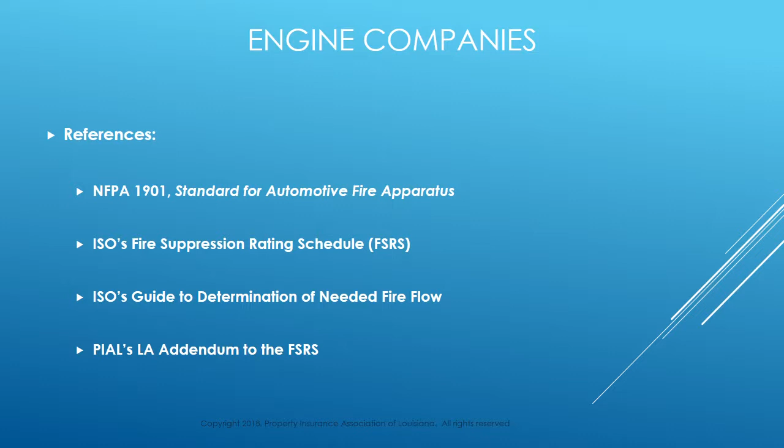References for criteria and credits related to engine companies are shown here. Before we address the engine companies themselves, we need to talk about a couple of items that affect them. The first is the concept of basic fire flow. The basic fire flow comes into play in several areas of your rating. Here's how we determine what the basic fire flow is for each graded area in the state.

Property Insurance Association manages a database of commercial properties in Louisiana. For each property, information related to building size, height, construction, and occupancies is made available to property insurers. PIAL uses formulas found in ISO's Guide to Determination of Needed Fire Flow to calculate, for insurance rating purposes, the amount of water required to fight a large-scale fire in each property in the database.

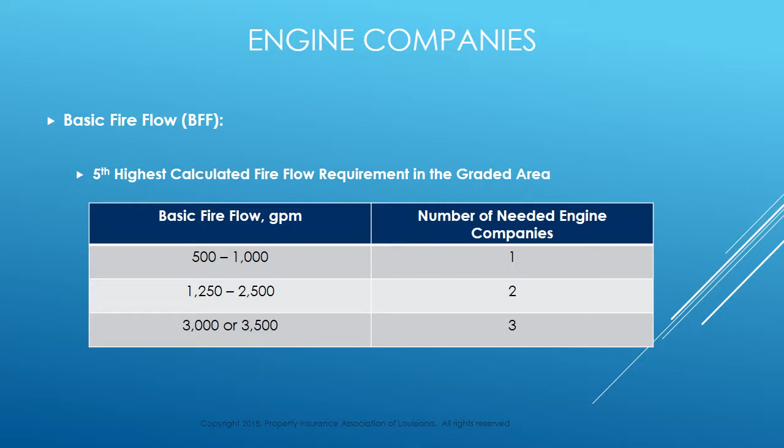First, please do not confuse this with the number of engines required to respond to structural fire alarms. We'll talk more about this in a minute. Second, please do not believe that if your basic fire flow is 3,000 GPM and you have two 1,500 GPM pumpers, that you can meet the needed engine requirement with just two pumpers. That is not true. Three engines are needed when the basic fire flow is 3,000 GPM. The basic fire flow simply defines the minimum number of engines the graded area needs to have to meet the calculated fire flow requirements.

The second area we need to address before we can discuss credit for engine companies is automatic aid. The difference between automatic and mutual aid is timing. If a neighboring fire department is paged and responds on first alarm as if that equipment were your own, it is eligible for consideration as automatic aid. If the graded area fire department makes the decision to dispatch the neighboring fire department, either while en route to or at the location of the alarm, this is a mutual aid call.

Only engines and ladder or service trucks and their manpower are creditable in the grading. But what about tankers? Tankers are not creditable in the grading, but if they respond as agreed upon in an automatic aid agreement, they may be considered as first alarm trucks on a water hauling lineup. Apart from manpower, automatic aid is only valid when it is needed, and it is only needed when the graded area cannot meet its own needs with their own equipment. We will address the manpower exception in another presentation dealing strictly with manpower.

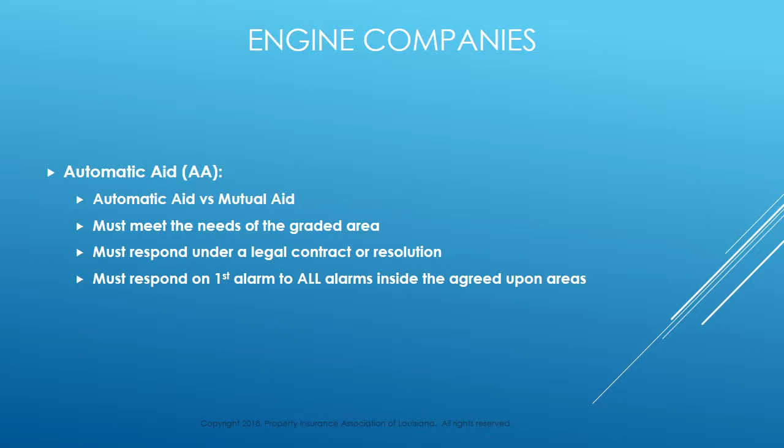Automatic aid may be needed because the graded area has a basic fire flow that requires 3 engines and they have fewer than that, or it may require 2 engines and they only have 1. Or it may be needed because of the geographical limits in the response areas of the graded area's own pumpers. To be valid, the automatic aid apparatus must respond under a legal contract or resolution, such as an automatic aid agreement, memorandum of agreement, or similar document, and the apparatus must be dispatched on first alarm to all structural fire alarms within the area defined in the agreement.

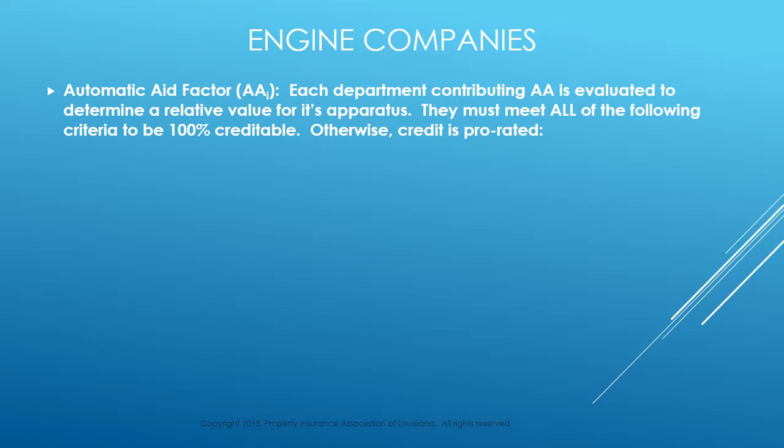When automatic aid apparatus is being credited in your grading, an automatic aid factor is calculated for each responding automatic aid apparatus. Once calculated, this factor is used to prorate the value of the automatic aid equipment or manpower throughout the grading. There are 6 areas that PIAL evaluates in building the automatic aid factor. The first involves an evaluation of the PSAP used to dispatch the automatic aid apparatus.

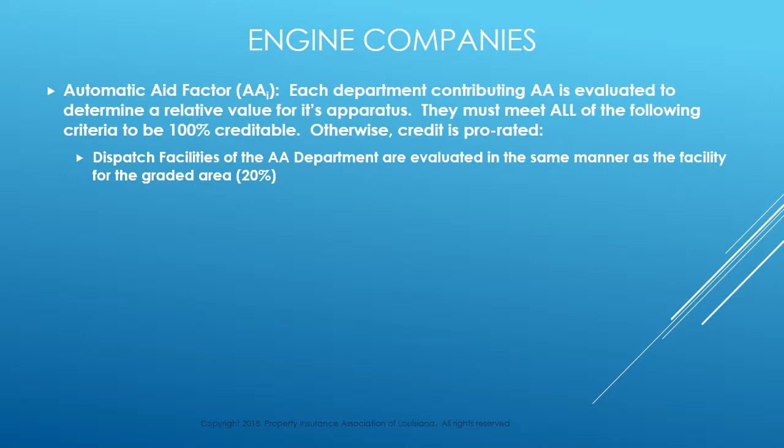Most of the time, this is the same PSAP used to dispatch the graded area's apparatus, but it can be different. Second, if there is more than one PSAP involved, there should be little or no delay in completing the dispatch of the automatic aid apparatus. Third, when the CAD system gives its dispatch recommendation to the dispatcher, that recommendation must include the automatic aid department.

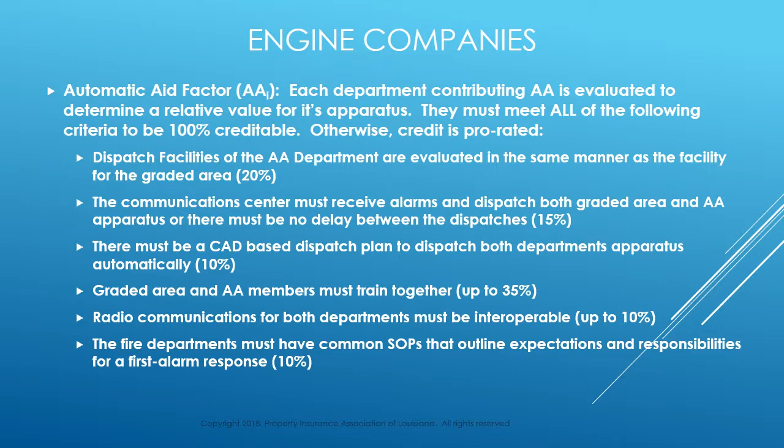Fourth, members of the graded area and the automatic aid fire department must train together at least annually. Fifth, radio communications for each department must be interoperable at the dispatch and/or the tactical level. In other words, members of the individual fire departments need to be able to talk to each other on the radio. Finally, both fire departments must have common standard operating procedures that outline expectations and responsibilities for a first alarm response. Each automatic aid apparatus may earn any or all of these credits.

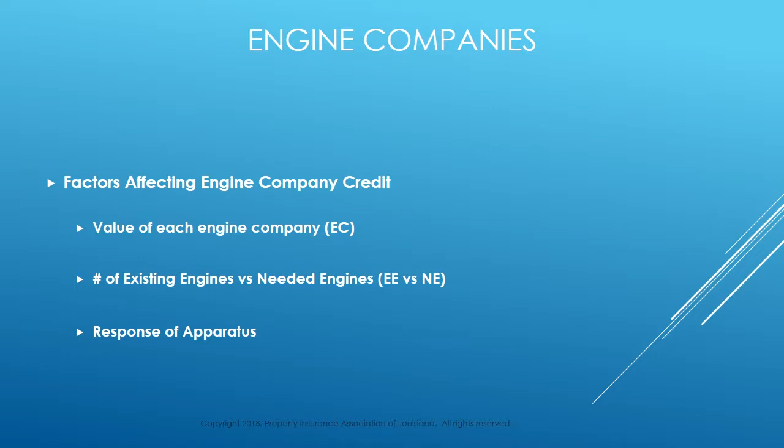We're now ready to look at the factors affecting engine company credits. Except for the automatic aid factor that is applied to automatic aid apparatus, there is no difference in how their equipment is credited and how the graded area's equipment is credited. Therefore, the following discussion will only address the graded area's apparatus. The credit for engine company is comprised of the three factors shown here.

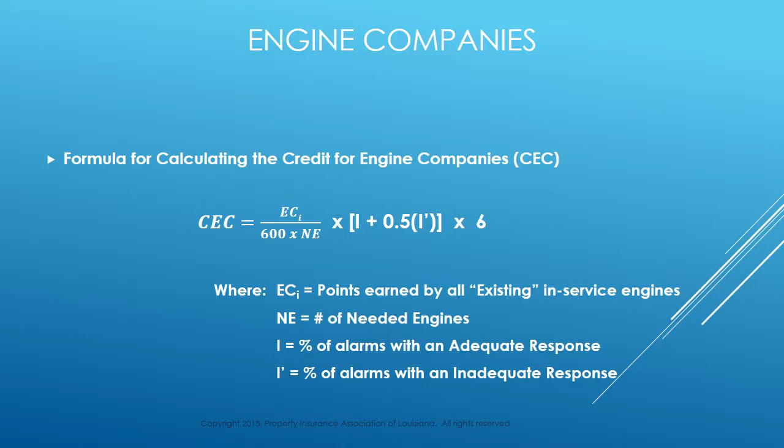By looking at the formula for determining EC, you can easily see that if a pumper's pump capacity is less than 1,000 GPM, or if it carries less than 1,000 feet of 2.5-inch or larger supply hose and 200 feet of 2-inch, 2.5-inch, or 3-inch attack hose, or if it is not fully equipped, its value is less than 100%, so its factor will be less than 1, and if either of these values are less than 1, even a fully equipped and properly tested pumper will not receive the 600 points of credit as an engine company.

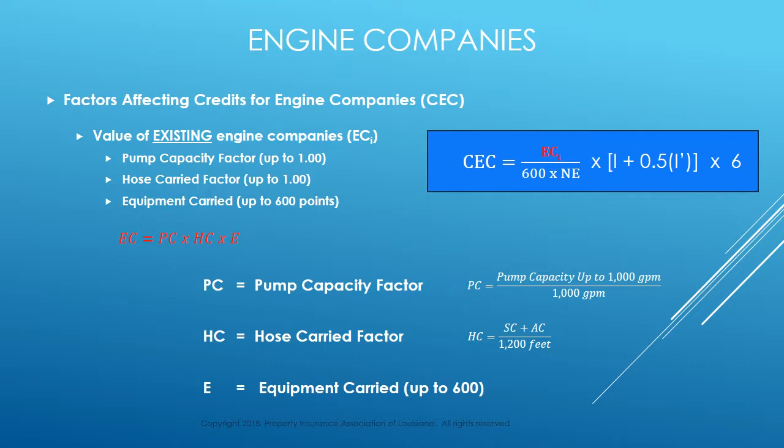By putting the subscript I at the end of the red EC found in the formula, we're saying that we are calculating the value of each engine and then adding them all together. We do that because in the denominator, we're going to multiply the 600 points possible by the number of needed engines for the graded area. So in essence, we're evaluating what you have compared to what you need and then moving on. An important thing to remember is that the number of existing engines will never be more than the number of needed engines. Let's look now at how that happens.

So how many engines does the graded area actually need? We get this question all the time, and the answer is not as easy as you might think. The highest number, after evaluating three factors, will determine the number of needed engines.

The second is the number of fire stations where a pumper that was used during the graded year is housed. If a station houses a pumper that was not used during the graded year, PIAL must evaluate why that pumper wasn't used, because normally we do not award credit for anything that you have that you don't need, and if you have a pumper but don't use it, the easy assumption is that you don't need it. There are 2 exceptions here.

We will do a road mile distribution study showing 5 road mile zones around each station where pumpers that were used are housed. We will then determine if the pumpers that were not used are housed in locations where their recognition as an existing engine company would prevent there being Class 10 areas, and if so, we will recognize that engine as both needed and existing at that location.

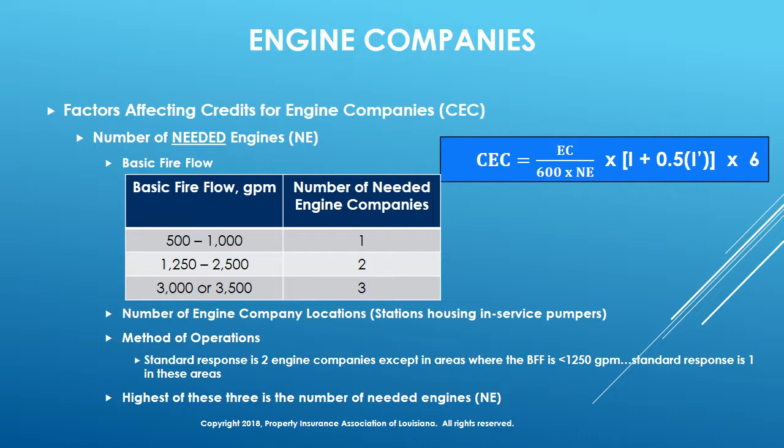With this in mind, it can easily be seen that to receive all 6 points for available engine companies, all existing in-service engine companies must have pumps rated at 1000 GPM or more, they must carry a full hose load, and they must be 100% equipped. In addition, you must have the engine companies that you need, and finally, you must have an adequate engine company response on all structural fire alarms, both working and non-working.